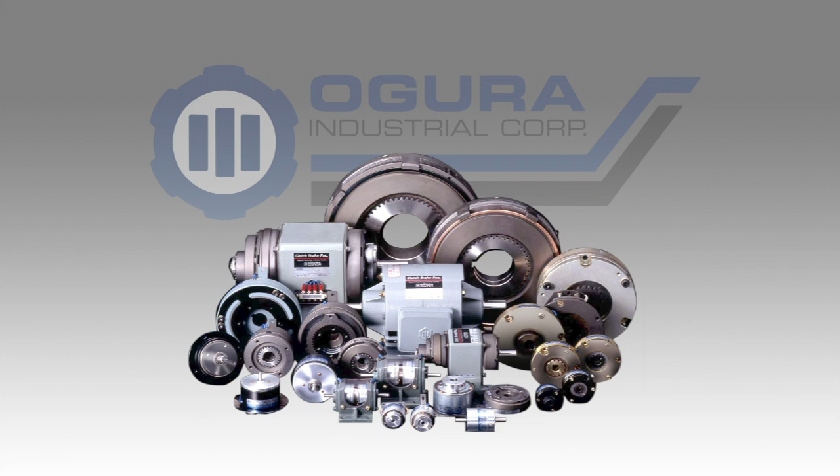Ogura produces a wide variety of electromagnetic clutches and brakes. In this troubleshooting video, we will primarily focus on single-surface electromagnetic clutches and brakes, which are the majority of all electromagnetic applications.

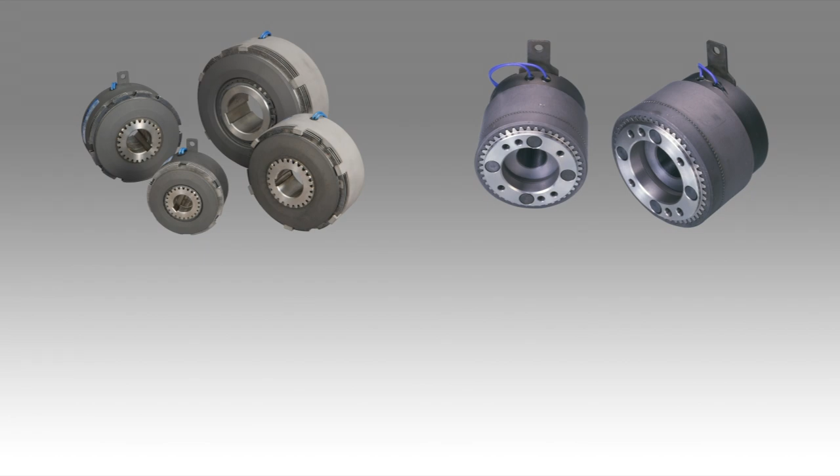Although the majority of electromagnetic clutches and brakes used in the industry are single-surface, many of the areas we will review will also apply to other types of electromagnetic clutches and brakes, such as multiple disc, tooth, spring-applied, and magnetic particle.

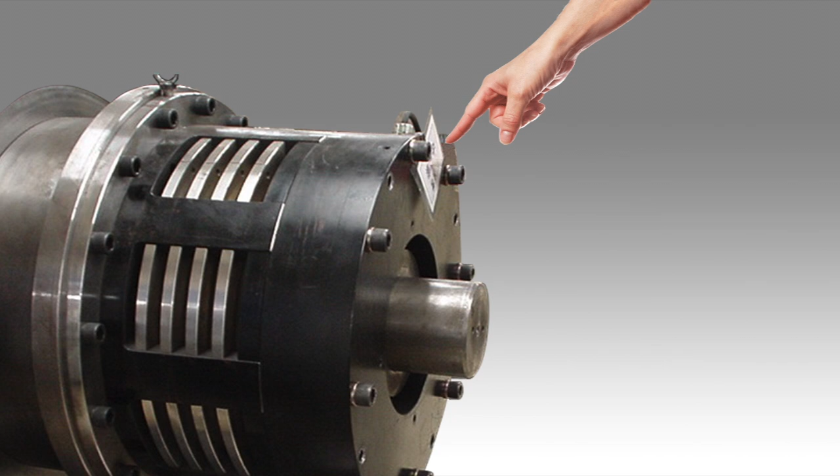Although there are many sizes of electromagnetic clutches and brakes, from very small to very large, the function of the components is the same. All electromagnetic clutches and brakes actuate electrically but transmit torque mechanically. The key components of the clutch are output, which can be direct connected or have a pulley or timing belt like the example shown here, armature, rotor, and field coil.

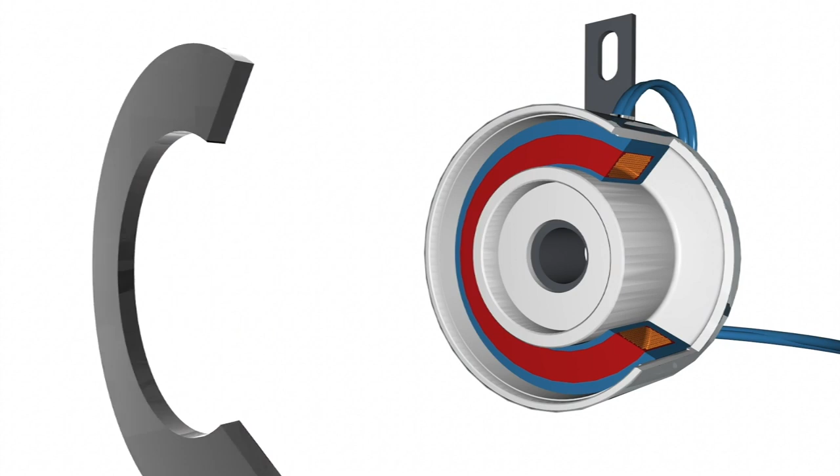When voltage or current is applied to the clutch, the coil becomes an electromagnet and produces magnetic lines of flux. This flux is then transferred through the small air gap between the field and the rotor. The rotor becomes magnetized and sets up a magnetic loop that pulls the armature against the rotor.

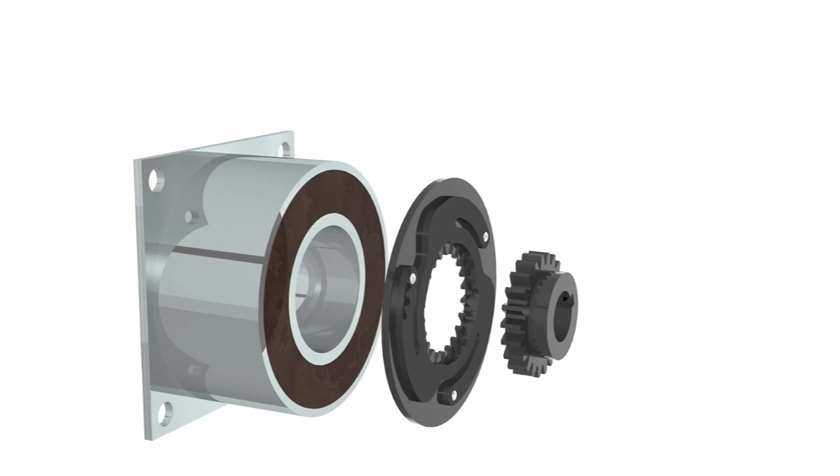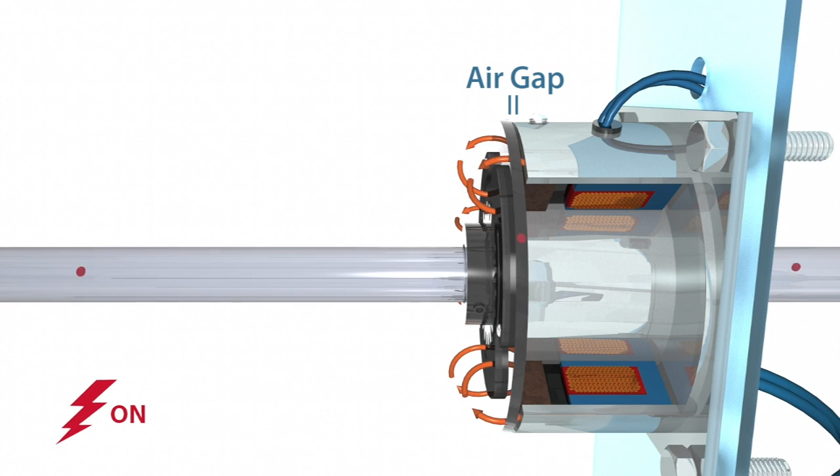For a brake, the key components of a brake are field coil, armature, and hub. When voltage or current is applied to the brake, the coil becomes an electromagnet and produces magnetic lines of flux. This flux travels through the small air gap between the field coil and the armature, magnetically pulling the armature against the hub and creating a holding force. When current or voltage is removed from the brake, springs hold the armature away from the hub surface, creating a small air gap.

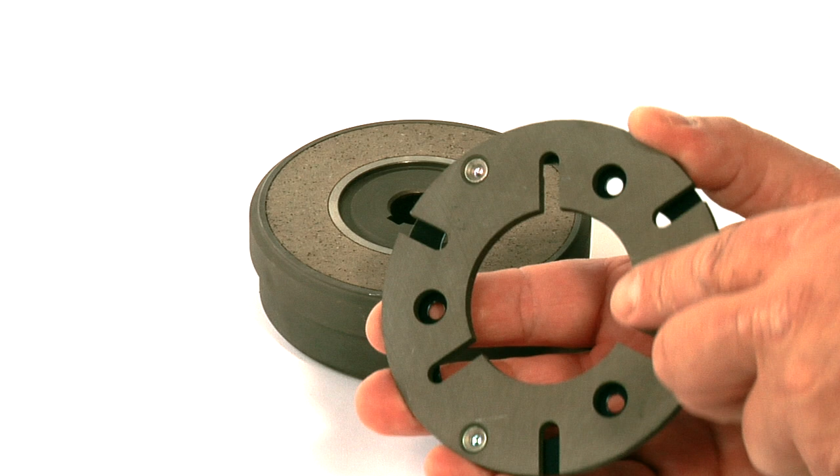Single-surface electromagnetic clutches and brakes normally have a single flux design for industrial clutches. This means that there is a north and south pole, and between the poles, there is friction material to help increase clutch or brake cycle life. When many users look at an electromagnetic clutch for the first time, they see that friction material is flush with the inner and outer poles, thinking that the material is already worn down. This is not the case. In order to transfer torque, a magnetic flux connection has to be made between the steel poles and the steel armature plate.

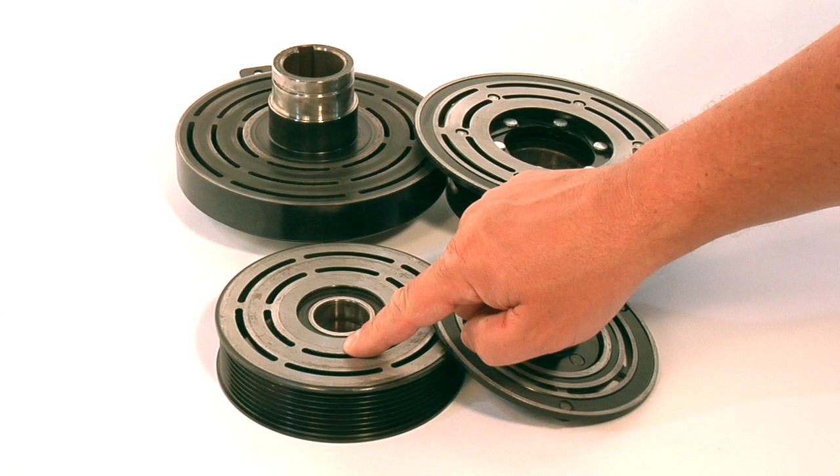For many mobile applications, double flux and/or triple flux clutches are used. These multiple flux clutches allow for greater torque in a smaller area. These clutches are typically steel-to-steel contact, so although torque is higher, cycle life is lower. They are usually used in automotive or off-road equipment.

With this in mind, to troubleshoot electromagnetic clutches or brakes, we look for problems either electrically or mechanically. In all cases, before performing the following checks, make sure all power is turned off and, where possible, remove the clutch or brake from the machine. In electromagnetic clutches and brakes, there are three main potential issues. They are engagement, noise, and excessive slipping or heat failure.

Before proceeding with engagement checks, make sure the shaft going through the clutch or brake can rotate. If it does not rotate when there is no power applied, a bearing may be locked up. If this is the case, check for bearing failure. Engagement. Engagement can be broken down into three sections, which are: the clutch or brake won't engage initially, the clutch or brake won't stay engaged after it is running, the clutch or brake won't disengage.

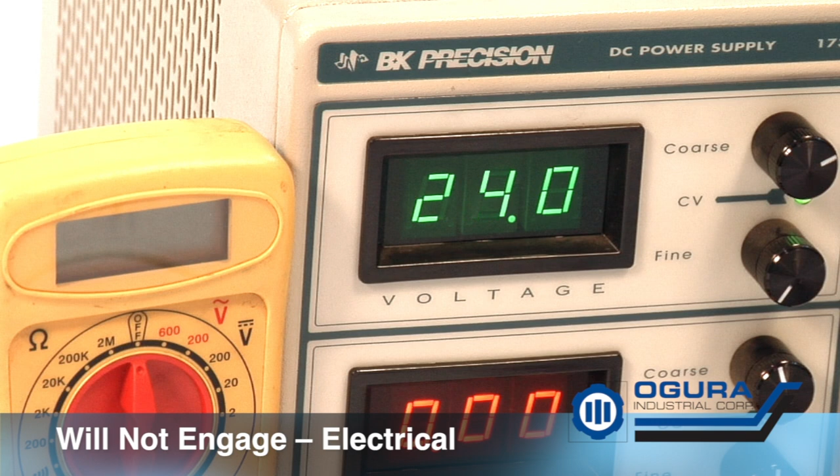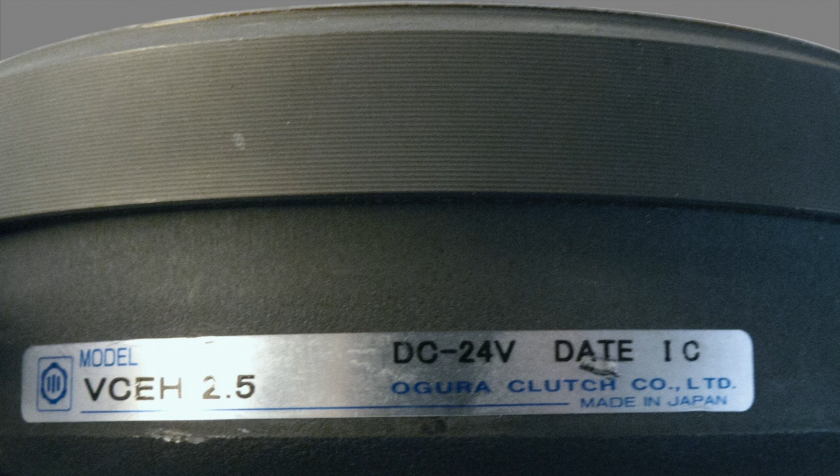Won't engage. Electrical. Is the clutch receiving the proper DC voltage? Make sure the voltage coming from the source is the correct voltage required for the clutch or brake coil. The voltage for the clutch or brake coil is typically listed on the label. Undervoltage may prevent the armature from pulling in, but overvoltage will cause the coil to short out and fail internally. Check the fuse to see if the fuse has blown. This can be on the AC or DC side.

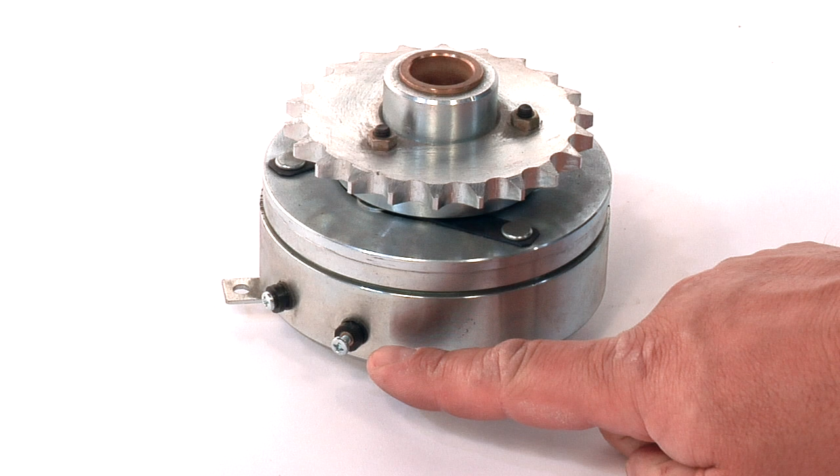Check the lead wire of the clutch or brake to make sure there are no cuts or that the wire isn't crushed. Check the terminal connections on the clutch lead wires and on the power supply to make sure they are tightened or not damaged. If the clutch or brake is receiving the proper voltage, the next thing to check is the clutch coil itself. Does it look like it is discolored or burnt? Either way, it is best to check the ohm rating on the coil. At room temperature, this should compare with the ohm rating listed on the clutch or brake data sheets.

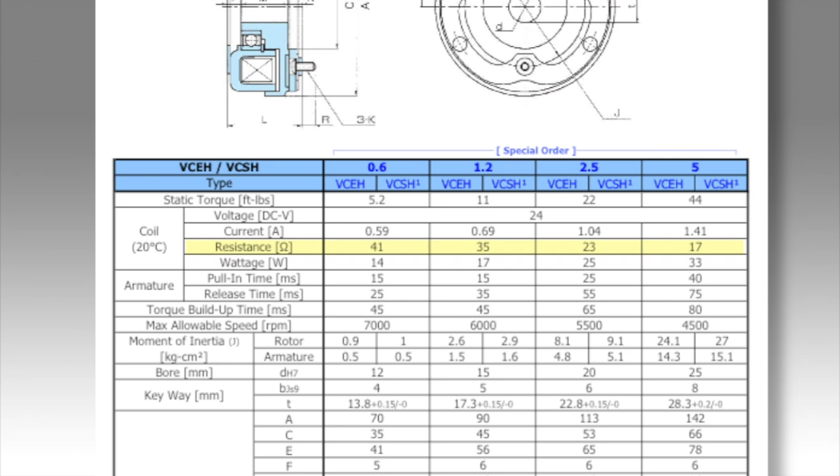If you notice discoloration on the coil shell or on the faces of the clutch or brake, the coil may have failed as a result of slippage or physical contact during rotation. Failure can occur if the field and rotor make contact with each other. This would be evident as a blister point on the coil, or if a clutch rotor is dented, this could cause contact. If the clutch shows signs of slippage or excess heat, refer to the slippage section.

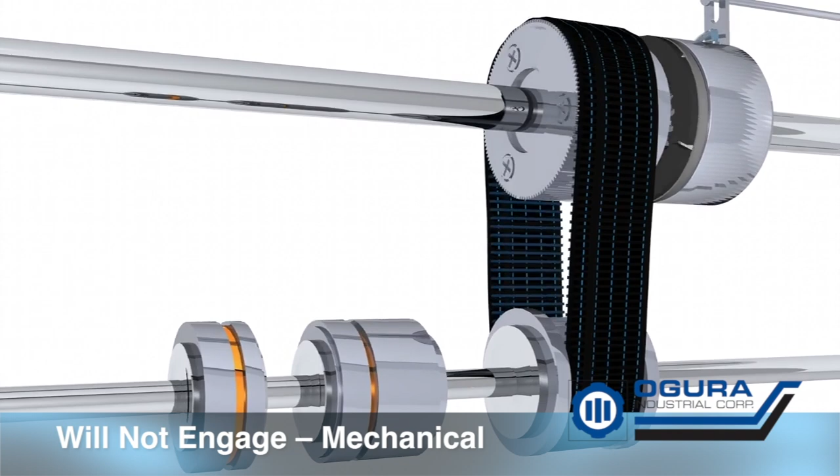Won't engage, mechanical. If the voltage and coil are okay, then the possible problem is with the air gap. The air gap between the armature and rotor on a clutch or the armature and field on a brake is critical. If the air gap is too large, the magnetic field cannot make the jump across the gap and pull the armature to make contact. If the air gap is set correctly but the armature doesn't move, then there may be some other obstruction preventing the armature from being pulled towards the rotor.

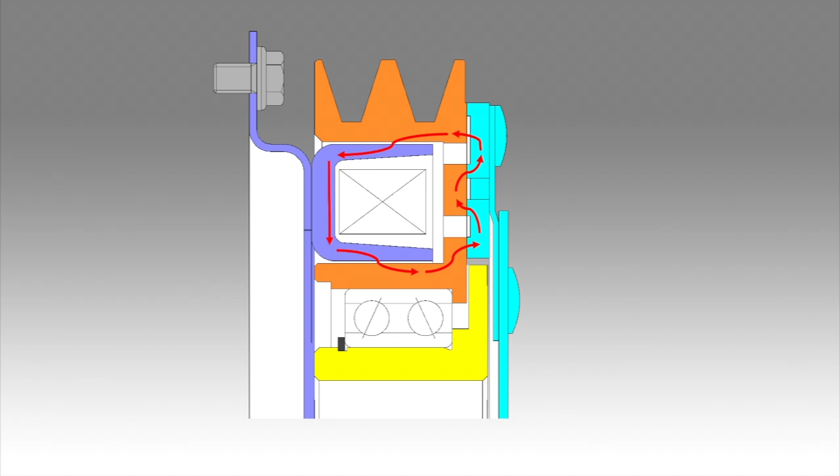Carefully check the movement of the armature to make sure it has free movement to the rotor or to the brake field. You should be able to push on the armature plate and see movement. The springs will always bring it back to its set location. Again, make sure the power is off when you do this, otherwise your fingers will get pinched.

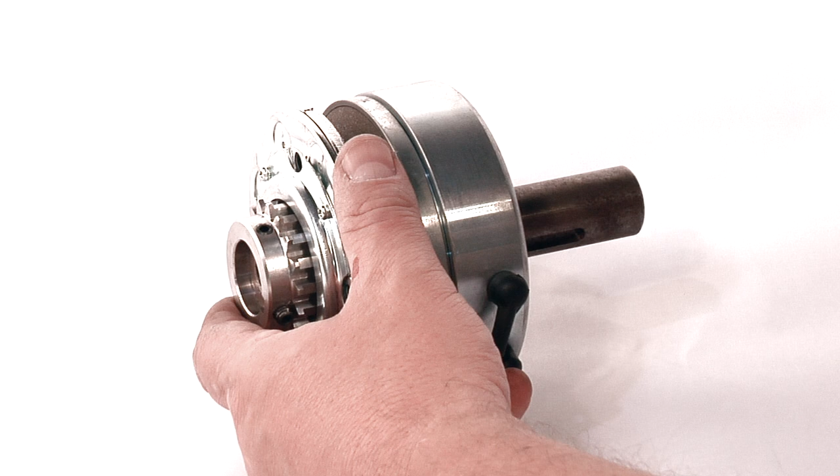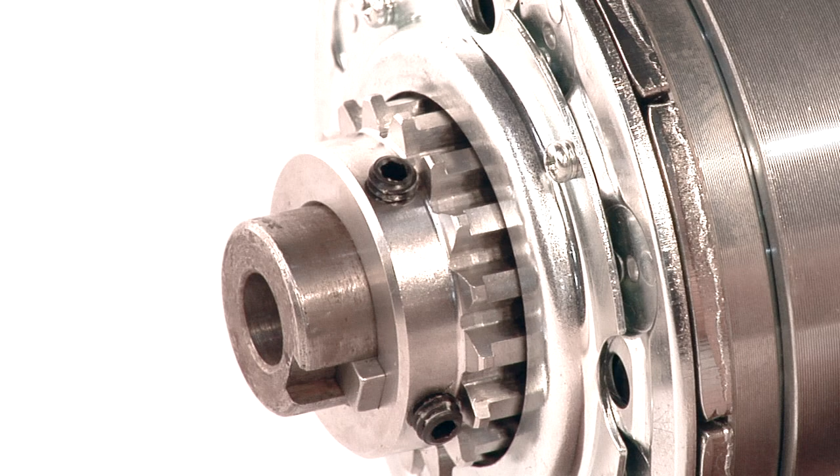On some clutch series, the air gap adjustment is automatic. On others, you can reset the hub to reset the air gap. However, there are limitations, because at some point, the wear on the armature will be too great, and it will not be possible to adjust the air gap for wear. At that point, the clutch or brake would need replacement.

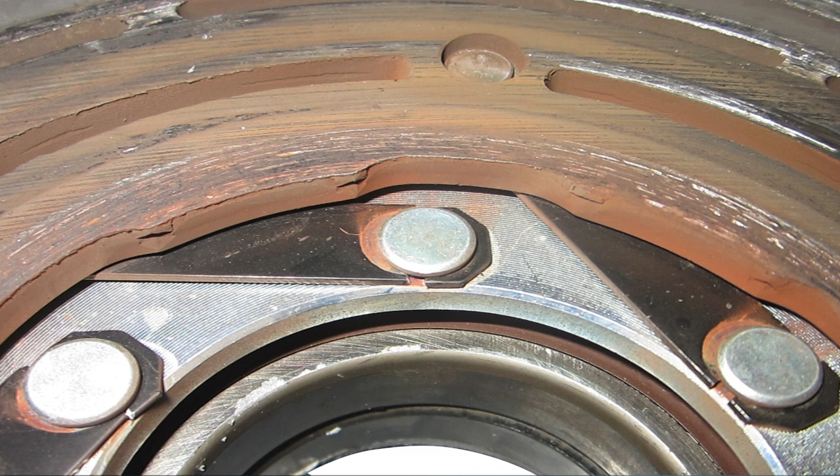If the clutch armature is engaging, but the load is not engaging, the key may be missing on the shaft, so the shaft would just spin inside the hub or the rotor. In most clutches and brakes, torque is transferred through the springs. If the clutch or brake is subject to heavy, reversing, or shock loads, the armature spring or springs may be broken, so torque cannot be transmitted. If everything checks out and the clutch is operating but not picking up the load, then the clutch is slipping. Refer to the slipping section.

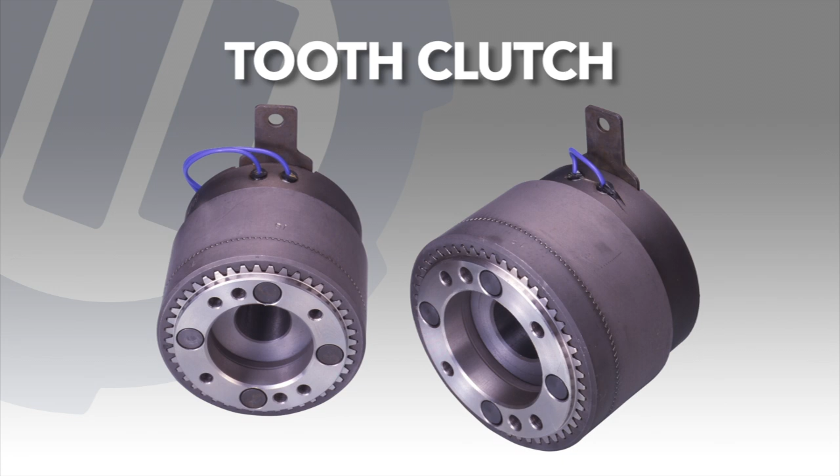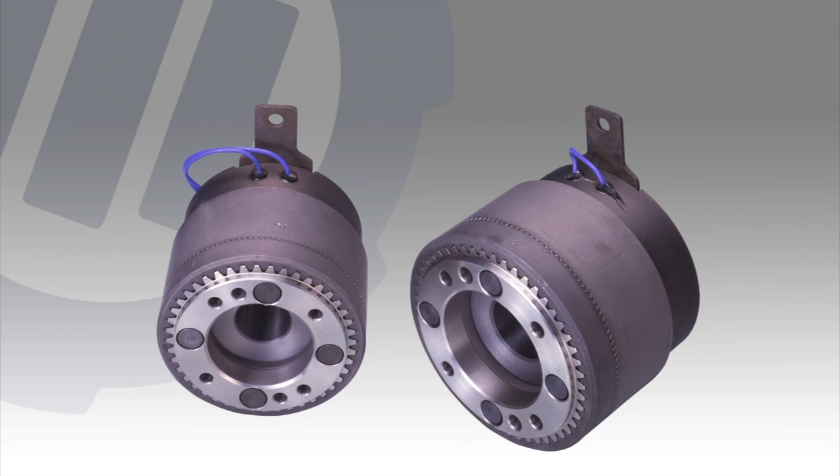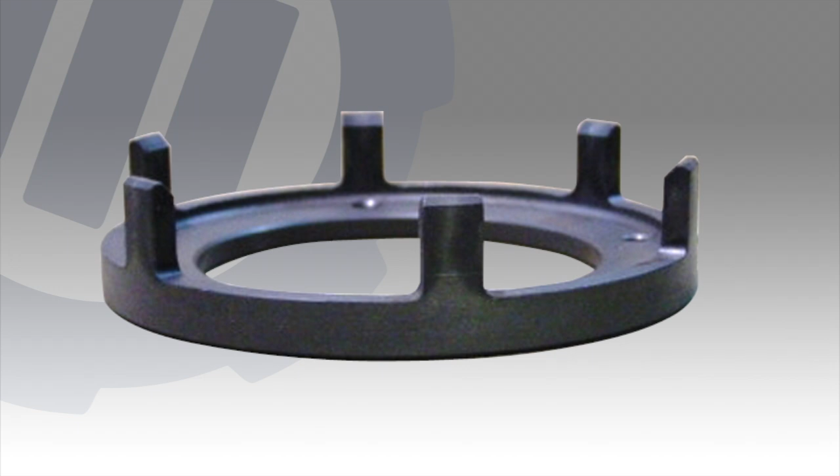For specialty clutches like tooth or multiple disc, there are two other things to look for. For a tooth clutch, it needs to have some relative rotation and load to engage. Otherwise, you could have tooth-to-tooth contact during an attempted engagement. For multiple disc clutches, if heavy vibration is present over long periods of time, the tangs of the friction disc can wear into the drive cup, preventing full engagement.

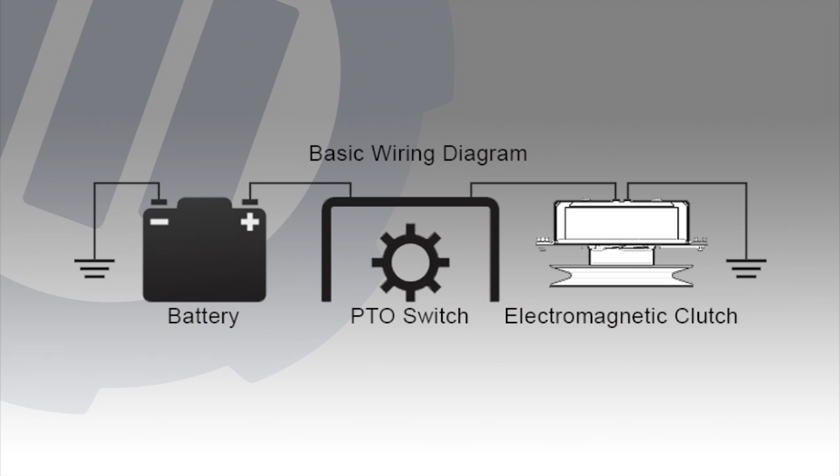Won't stay engaged, electrical. Check to make sure the switch is okay. Depending upon the installation, there are a variety of switch options that can be used. Some are direct, some are indirect. You may have to check not only the switching mechanism controlling the clutch or brake, but any other relays that may be in the electrical system as well. An intermittent or malfunctioning switch can cause a clutch to cycle, which can induce slipping.

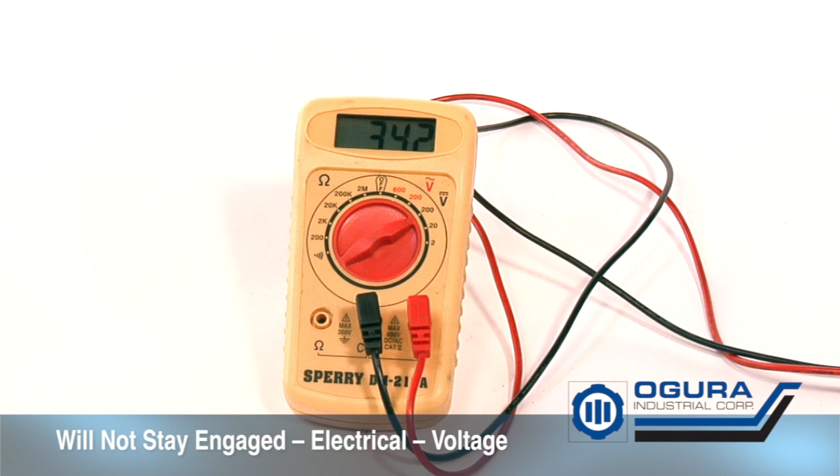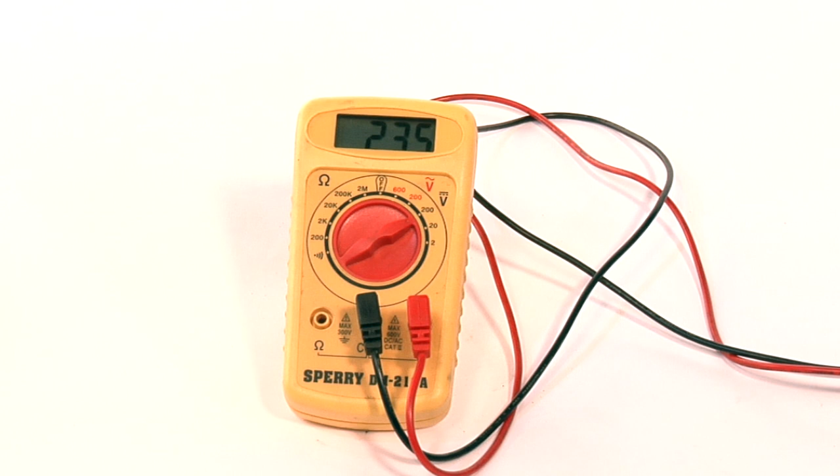Check your voltage to make sure it is consistent and not varying. If the voltage is varying, the cause could be on the DC side or on the AC side of your power supply. Check the lead wire to make sure there are no cuts, and to make sure the wires in the terminals are properly crimped and making contact. Also, a crushed lead wire could have breakage internally. If you get an intermittent reading while moving the wire, the lead wire is damaged.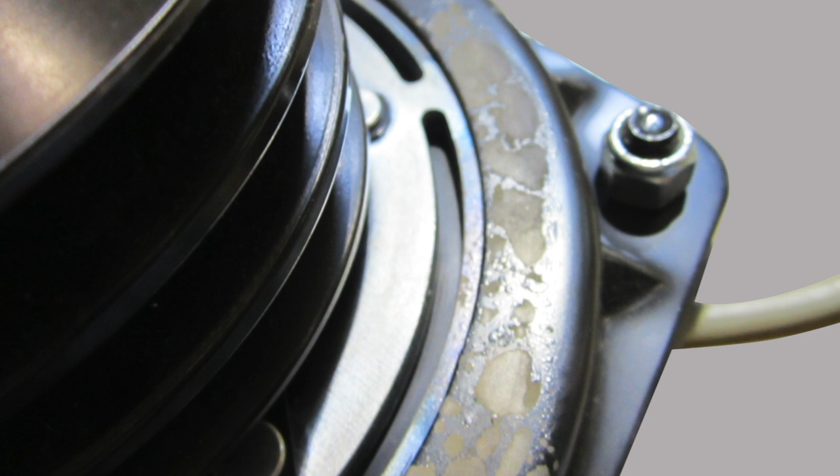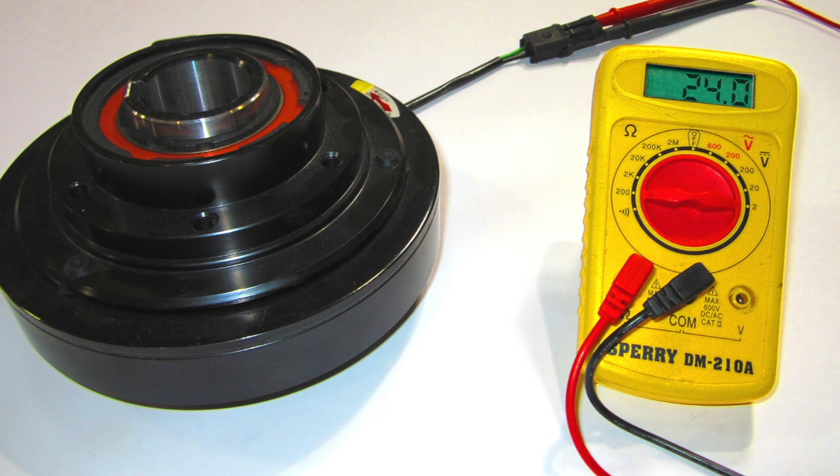Won't stay engaged, mechanical, electrical. Check for signs of heat. If excessive slippage is noted, the coil could be damaged. As coils heat up, the insulation coating on the magnet wire can break down. This causes electrical leakage and higher amp draw in the coil and less torque available in the clutch or brake. A coil at room temperature may appear to be normal, but after it heats up, it may have a higher amp draw. To test for this, connect the clutch or brake to the power supply for approximately 2 hours. If there is a significantly lower ohm reading, the unit would need to be replaced.

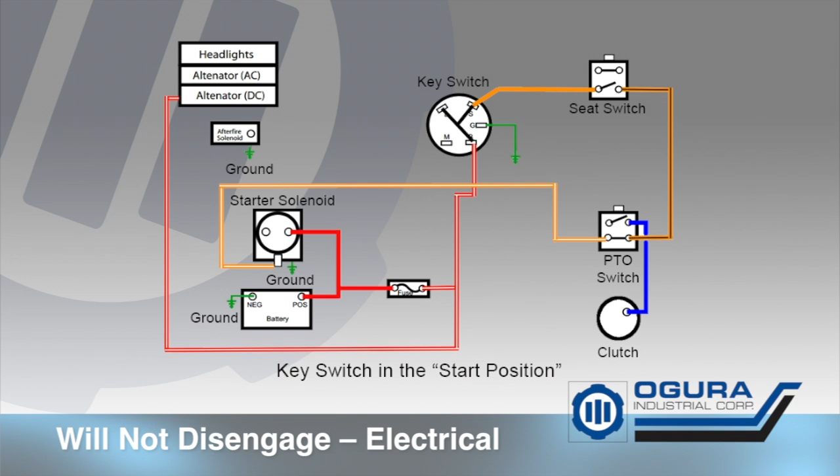Won't disengage, electrical. Confirm that the voltage is being turned off to the coil when required. If voltage is not being switched off, then the switch may be damaged and needs to be replaced.

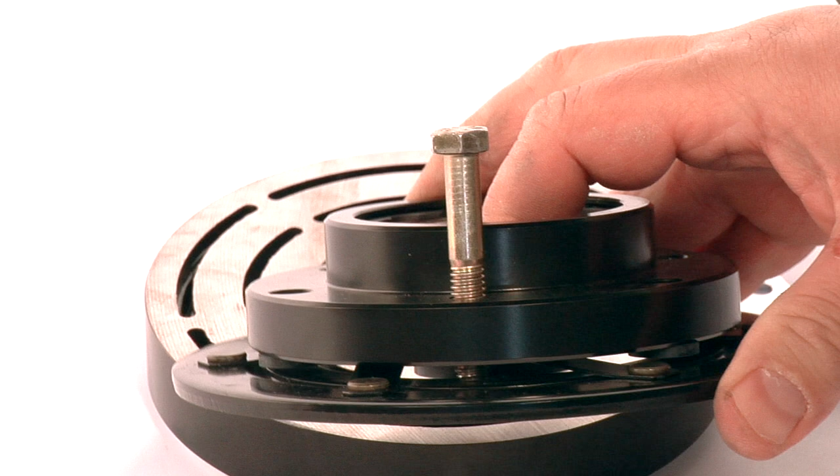Won't disengage, mechanical. Check the armature and make sure that there is freedom of movement. A slight air gap should be created when clutch power is off. Most clutches have springs to pull them back to maintain an air gap. Make sure that there is nothing pressing on the armature, such as a screw or fastening mechanism.

The clutch could be galled. If a clutch is unburnished and slips, metal chips can flake off and the clutch can become galled. Sometimes they can get caught between the plates, and because of the pressure, they melt, and the clutch or brake can become friction welded together.

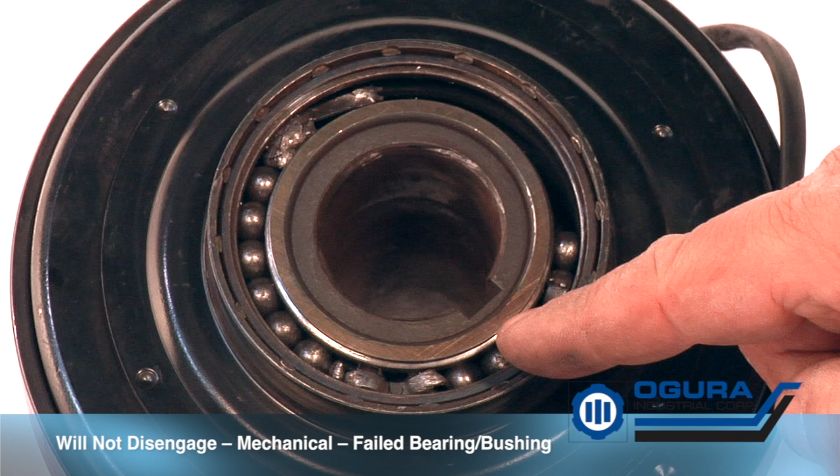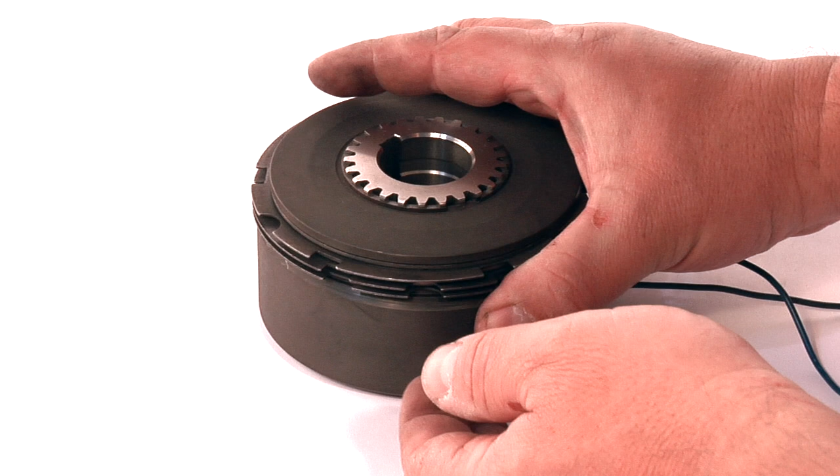For a clutch, the armature sleeve or ball bearing may have failed. If the bearing on the armature is locked up, the clutch will want to drive when there is no power applied. For multiple disc clutches, alignment of the drive cup and the friction disc is critical. If these are misaligned, this can cause binding and prevent the clutch from properly disengaging.

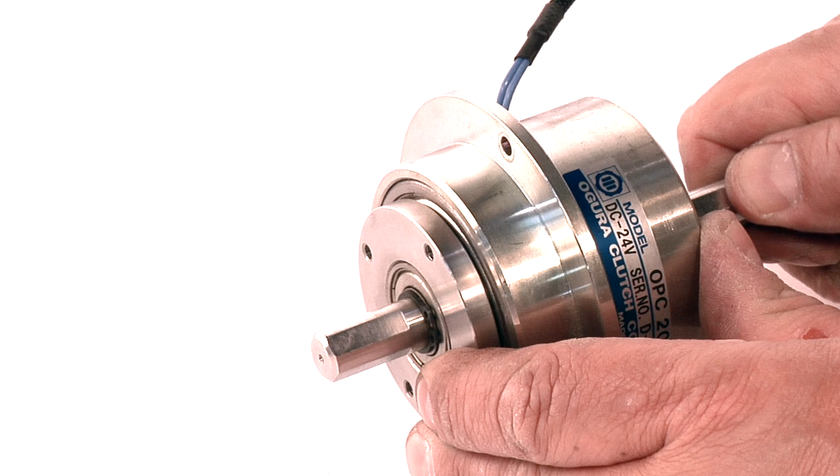For magnetic particle clutches, magnetic particle powder can sometimes be packed due to vibration. Powder can be released by tapping with a rubber hammer and then cycling the clutch or brake to redistribute the particles. Additionally, with magnetic particle units, if the heat dissipation rating is exceeded, bearing seals can break down. Powder can migrate into the bearings, causing the bearings to lock up. This can be felt during rotation by hand. If this is the case, the clutches will need to be replaced and cannot be repaired.

Noise. In almost all installations, noise is a mechanical occurrence. There is noise when a clutch or brake engages. If the noise is extreme, the clutch or brake may be undersized for the application. Also, in many belt-driven applications, there is noise coming from the belt and not the clutch or brake. The noise you hear will give you an indication of where to look, but there should be no noise from a clutch after it is engaged or a brake when it is disengaged.

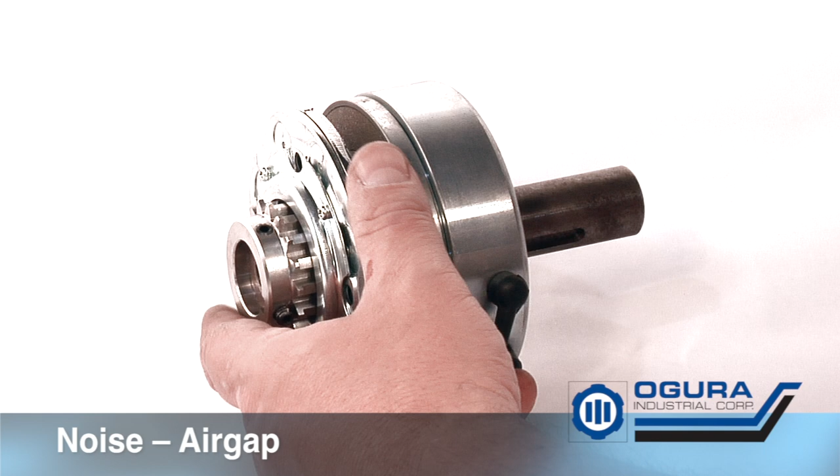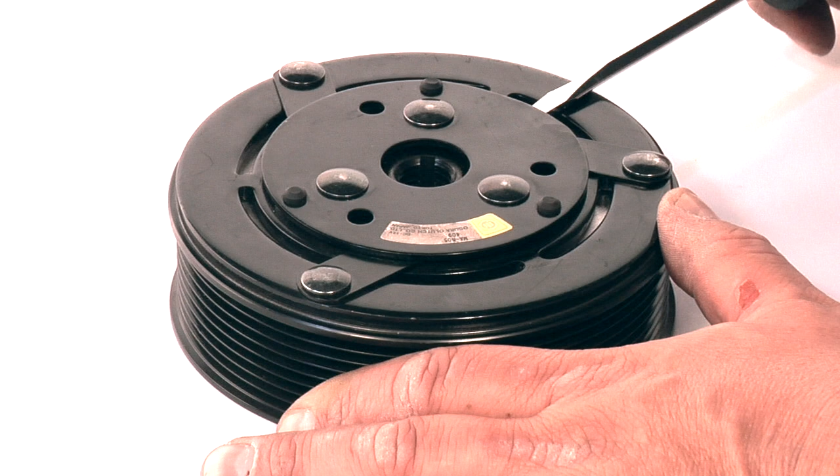If the noise is an intermittent scraping sound during rotation, it is possible that the armature may be too close. Back off and reset the air gap. Make sure that there is no damage on the armature, causing it to be deflected towards the rotor. For mobile clutches, the cover plate may be bent, pushing on the armature. The cover plate can be pried back, creating a proper air gap. For PTO clutch brakes, the air gap may be too small. Check the air gap with a feeler gauge and back off if necessary.

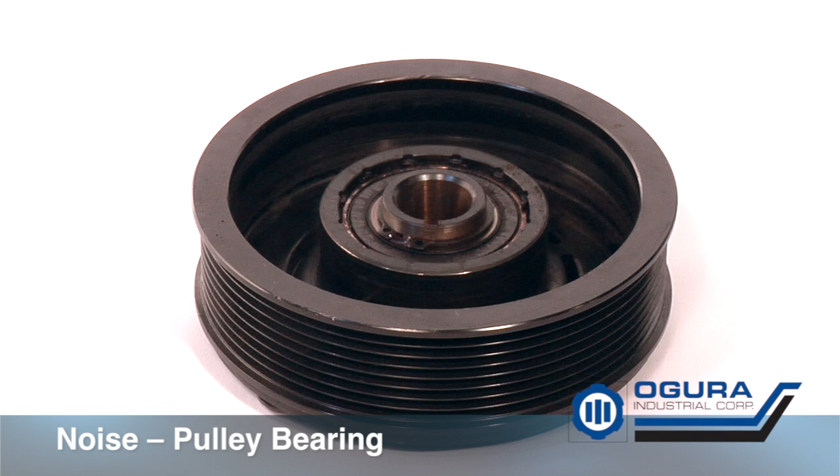Is the clutch or brake hub able to move on the shaft? If so, it is possible that the key is not inserted correctly, or the set collar or other device used to keep the clutch or brake hub on the shaft is somehow loose, and noise is coming from movement. If the noise is present in a bearing-mounted clutch when it is disengaged, but the shaft is rotating, then the noise problem can be with the field or pulley bearing bushing. If the clutch feels rough or there is noise present during rotation, the bearing has failed. Good bearings should spin freely with no noise or vibration.

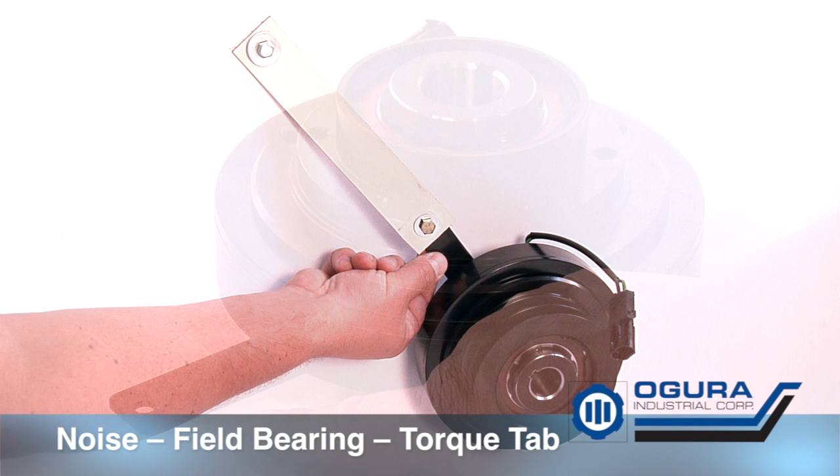Noise from bearings in the clutch or brake can be from brinelling, which is physical damage to the bearing races from excessive vibration or shock load. False brinelling can occur if the bearing races have no relative movement for long periods of time and are subject to vibration. A noisy bearing is an indication that the bearing will eventually fail and the clutch or the bearing need to be replaced. Check the torque tab to make sure the torque tab has free movement. The torque tab should not be tightened down. This will cause field bearing failure.

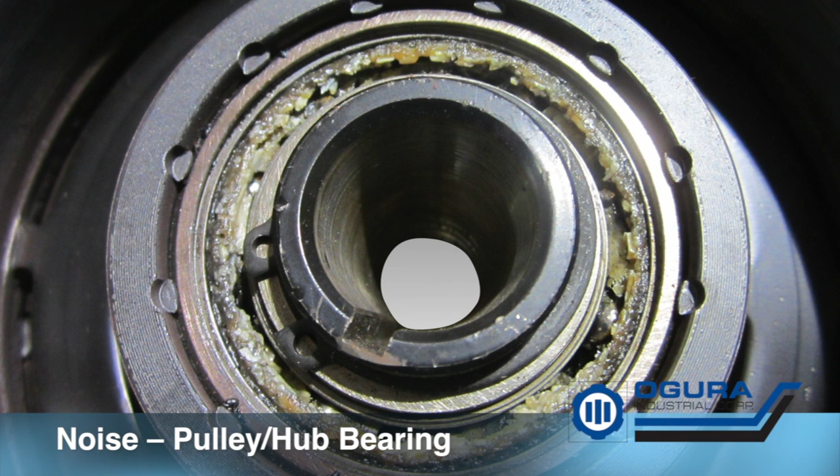If the noise goes away when the clutch is engaged, then the noise is coming from the pulley, hub, or sprocket bearing and needs to be replaced. To determine the cause, check the following: axial or radial loading. Check the loading and make sure the bearing or bushing load is not exceeded. Bearing seal. If the clutch has a ball bearing, check the seal area to make sure the seal is still intact. The seal could have been physically damaged, or in many cases, in outdoor applications, the grease can be blown out from pressure washers. If you think this may be the case, you can remove the seal to check. However, once the seal is removed, it is very difficult to replace, so the bearings may no longer be functional.

If the bearing is burnt or discolored and the clutch is also discolored, the bearing could have failed due to high heat generated from either an outside source or slipping. If slipping is suspected, please refer to the slipping section. Inspect the armature and rotor for damage. If the rotor is bent, dented, or contacting something else, that is the noise source.

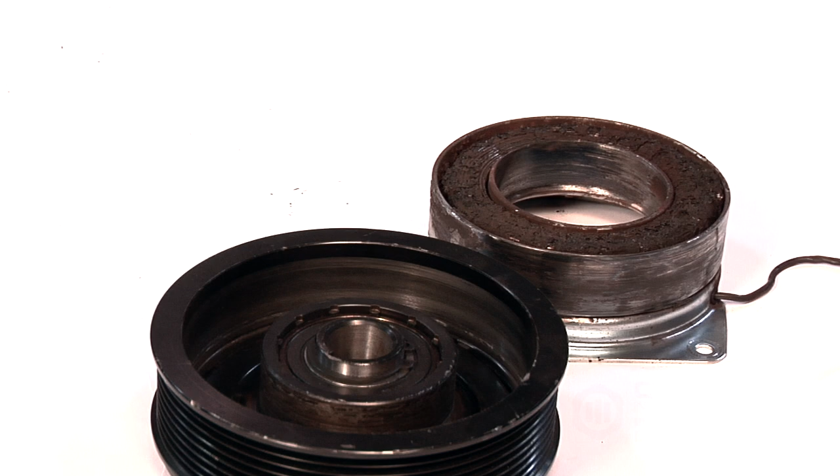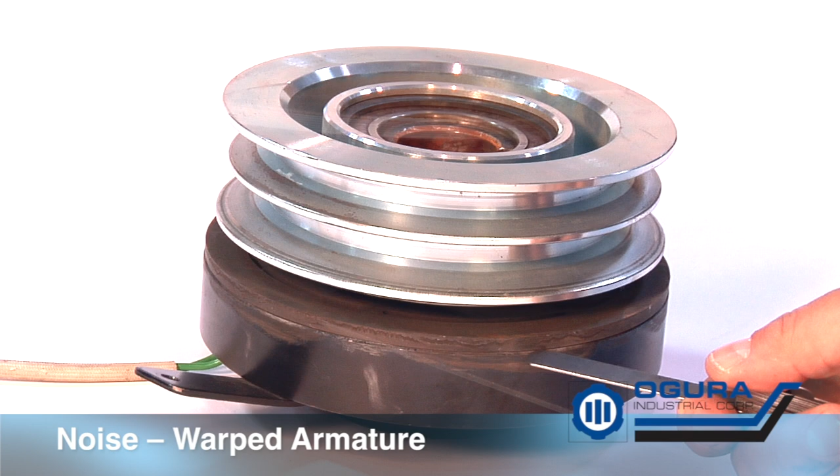If you have a two-piece clutch and noise is noticed during engagement, there could be mechanical interference between the rotor and the field coil. This noise would be different from the intermittent scraping noise that would occur with the armature set too close. It would be more of a constant noise. This is known as rotor strike. Rotor strike is the most common noise occurrence and is also the most common reason for eventual failure in two-piece clutches if it is not corrected. Rotor strike typically means that the concentricity is off between the shaft holding the pulley armature assembly and the backing plate holding the field. If the noise is noticed, the clutch needs to be taken off and reassembled. If the armature is warped from slipping, it can drag against the rotor.

Excessive slipping. The most common failure for an electromagnetic clutch or brake is that it has slipped, or slipped to the point where it is burned up. Diagnosing the problem can be a little tricky because when a clutch or brake has slipped to the point where it is burned and no longer functioning, multiple component failures may have already occurred.

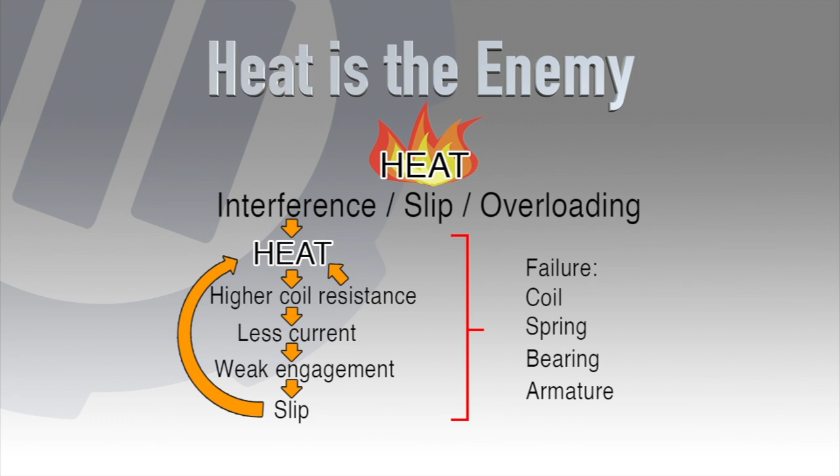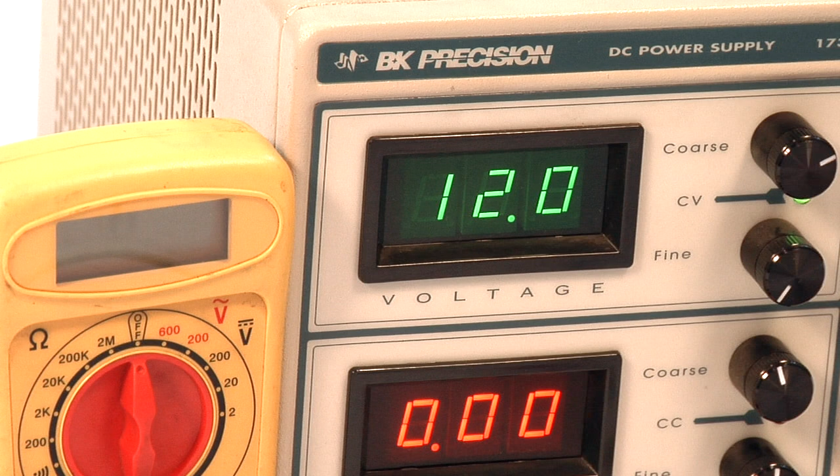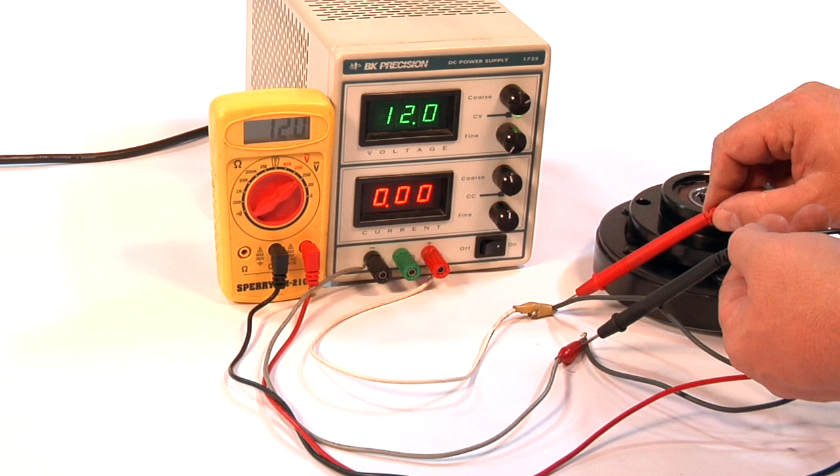Heat is the enemy of a clutch or brake. If the clutch or brake cannot dissipate the heat being generated, its ability to transmit torque degrades. Excessive slipping: electrical. Check to make sure the proper voltage current is going to the clutch or brake. If you have a constant current supply, the relationship to voltage and torque is almost linear. What this means is if you have a clutch or brake with a 12-volt coil and you are applying 8 volts, you are only going to get 2/3 of the torque out of the clutch or brake.

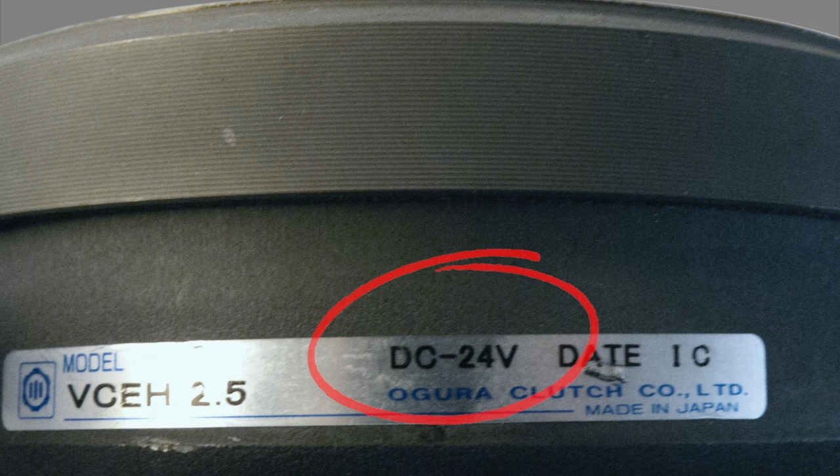Make sure that the input to the clutch or brake is at its rated voltage. Make sure the lead wires are not cut or crushed. If the lead wire has damage, the coil will not receive full voltage, or it can be receiving intermittent voltage, which reduces the ability of the clutch or brake to transmit its full torque. The internal magnet wire may be damaged due to high heat.

Check the ohm rating at room ambient temperature and then apply voltage to the coil. Depending upon the size, it may take up to 2 hours for the clutch or brake coil to saturate its temperature. Then, take a reading. It should be a little higher. If there's a drastic difference, the clutch coil is already damaged due to heat, and the coil will have a higher amp draw. Excessive slipping: mechanical.

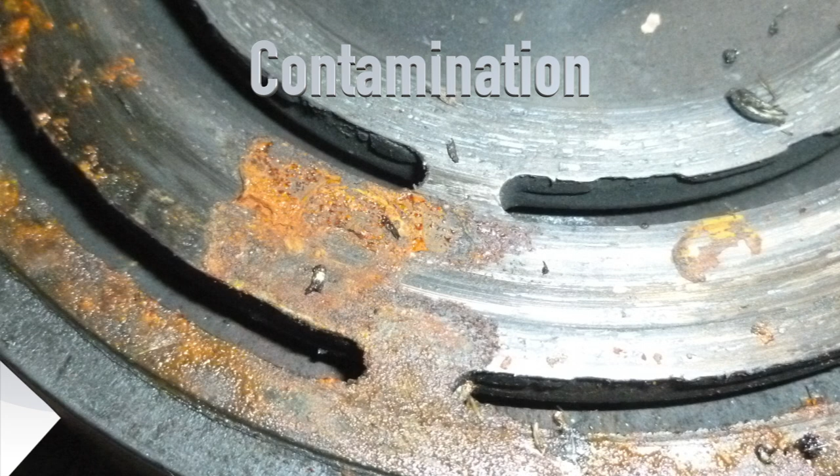Contamination. Clutches can slip due to contamination, so all lubricants should be kept away from the contact surfaces, the exception being a wet multiple disc or tooth clutch that is made to run in oil. Clutches used in outside environments typically do not contain friction material because sometimes if friction material gets wet, it can swell, preventing the clutch or brake from completely connecting the magnetic circuit, lowering the torque and causing slippage.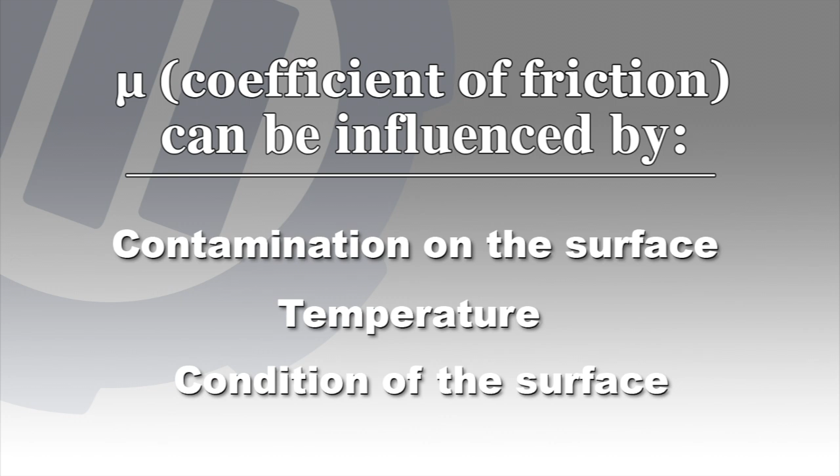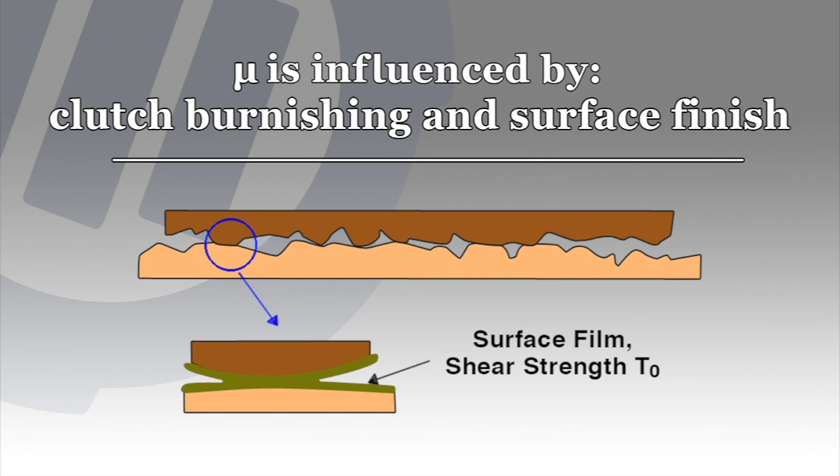The surface friction can be influenced by contamination on the surface, temperature, and the condition of the surface. Most mobile clutches do not have friction material and are steel on steel. To develop maximum contact area, the clutch or brake needs to go through initial cycling, burnishing, to wear down these high points. Unburnished clutches can have a 20 to 50% reduction from their catalog-rated torque, so a new mobile clutch that was unburnished can develop galling.

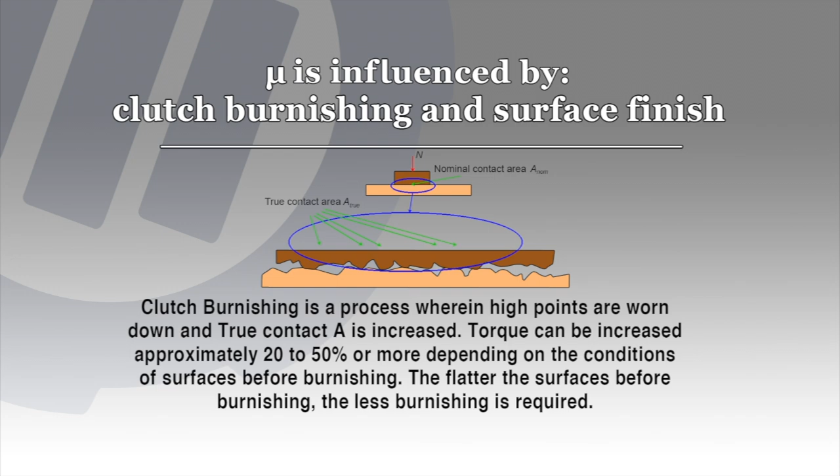Galling is glazing of the surfaces, which drops the coefficient of friction and reduces the amount of torque the clutch or brake can develop. A low hour slip failure is normally due to lack of or improper burnishing. Pressure is influenced by coil resistance, voltage, and current. Outside heat can affect the ability for the coil to generate flux. Basically, the hotter the temperature, the weaker the coil becomes.

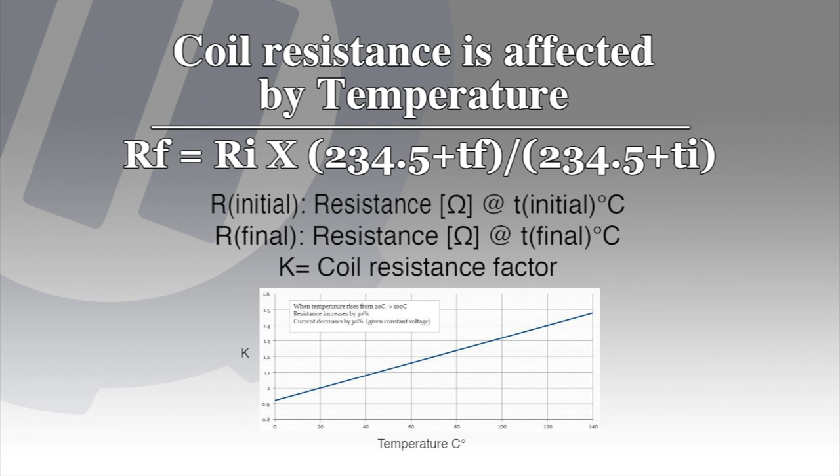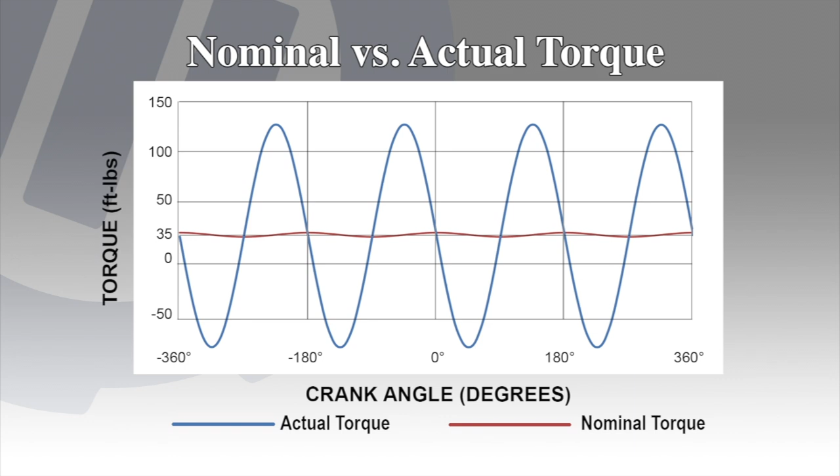If the power supply is not constant current, like it would be in most mobile or battery applications, then coil flux can degrade as the temperature rises. Torque spikes in excess of the clutch or brake's rating will cause accelerated wear or slipping. Clutches that are mounted on gas or diesel engines will require an additional torque service factor, which can be 4 to 5 times nominal engine torque, to withstand piston and crankshaft torque spikes.

We hope this gets you on your way to troubleshooting electromagnetic clutch and brake issues.